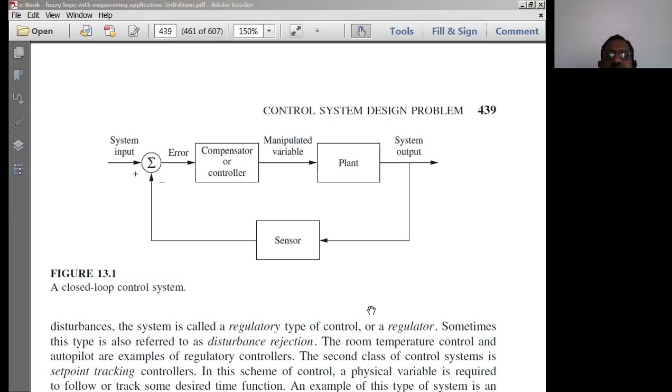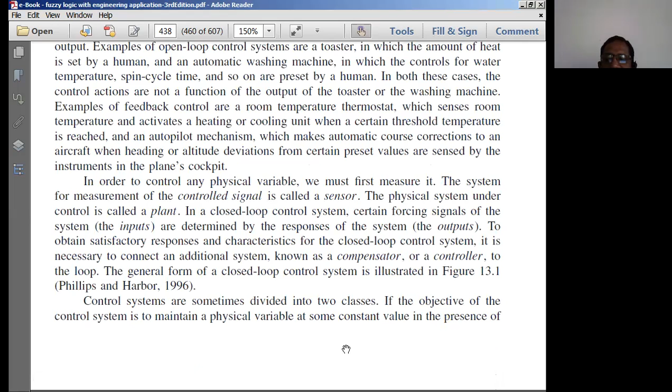So what is the objective of going for a regulatory control system? If the objective of the control system is to maintain a physical variable at some constant value in the presence of disturbances, irrespective of external disturbances, then the system is simply called a regulatory type of control system, or can be called a regulator.

So we thought of a negative feedback amplifier. What is the purpose of a negative feedback amplifier? The purpose is to stabilize the output response of the amplifier. If you think only of stability as the matter of concern for the output of an amplifier, in that sense, in the sense of achieving stability of the amplifier, we can call that control system a regulatory type of control system, where stability is the focus.

It has to be stable, right? So it has to be stable in terms of the frequency response. We expect the frequency response to be stable, to be flat. That means, irrespective of the changes in the parameters of the amplifier, we want the output response in terms of bandwidth and frequency response to be stable for us. So in that sense, the amplifier's closed loop control system is simply a regulatory type of control system.

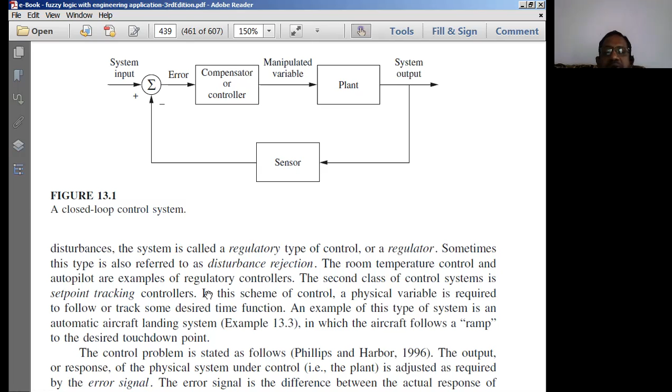So it is normally based on set point tracking controllers, and one is the regulatory type of controller. We can mix up these two applications, autopilot and automatic aircraft landing system, to get advanced aircraft control systems.

But here we are dealing with only examples. So two types of control systems in general we have in fuzzy logic applications: one is the regulatory type of control system, the other is called set point tracking control system.

In this scheme of control, the physical variable is required to follow or track some desired time function, and accordingly the plant output is going to behave. Imagine the plant is an aircraft, and the application here is an automatic aircraft landing system.

So the aircraft has to land automatically. The decision of landing or not to land is based on the tracking mechanism, tracking some desired time function. Based on the results obtained from tracking this desired time function, the pilot is going to make a decision whether to land or not.

So the pilot is more or less going to depend on the electronic system. This electronic system makes a decision based on external variables, or the external atmosphere. Based on the atmosphere prevailing outside, the pilot decides whether to take a landing or not, based on the parameters received.

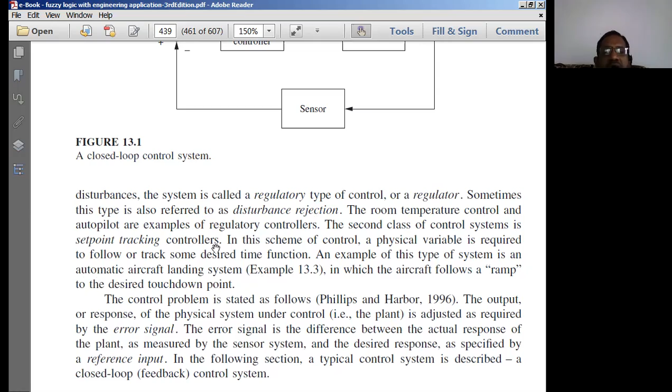Now let us look into a control system design problem normally preferred for fuzzy logic control systems.

The general problem of feedback control system design is defined as obtaining a generally nonlinear vector valued function h.

The input you apply to the plant is very important. For example, think of an aircraft landing system: the input you apply to the aircraft is very important. Based on the input applied, the decision will be taken, meaning the response is considered based on the type of input applied. So what are the important parameters for this control system in general? The input to the plant in terms of a generalized block diagram.

In the generalized block diagram, the plant can be treated as an aeroplane. Before the signal is given to the aeroplane, you normally have a fuzzy controller system, which gives various inputs to the plant, and this plant produces some output. This output is fed back by a sensor to the input of the controller. The input to the controller normally has two inputs: the reference input, called the external applied input, and a feedback signal, which produces an error signal.

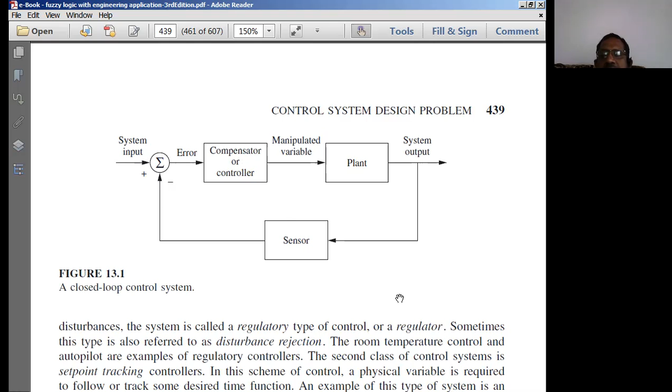So now we normally write a mathematical model of the control system. The general problem of feedback control system design is defined as obtaining a generally nonlinear vector valued function—because this function h represents the response of the fuzzy controller.

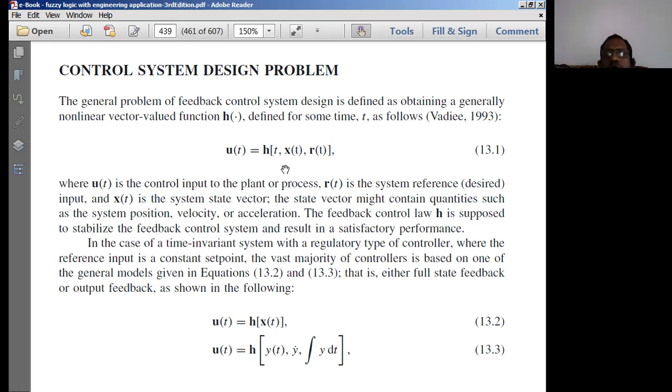The output of this fuzzy controller is always going to be nonlinear in nature, not linear, because it's based on various parameters. Time is always changing, and based on this, these other parameters also change, giving a nonlinear response. So the function implemented by a fuzzy controller is always going to be a nonlinear vector valued function—it is not linear.

So we have a nonlinear vector valued function h of dot, where u of t, as I mentioned, is the control input given to the plant or process—in our case, an aeroplane. And r of t is the reference input, the desired external input applied to the entire control system.

And x of t is the system state variable, known as the error signal for us. The system state variable might contain quantities such as system position, velocity, and acceleration—so the error function depends on many parameters.

Next is the feedback control law. This function h normally supports the feedback control law, which is supposed to stabilize the feedback control system and result in satisfactory performance.

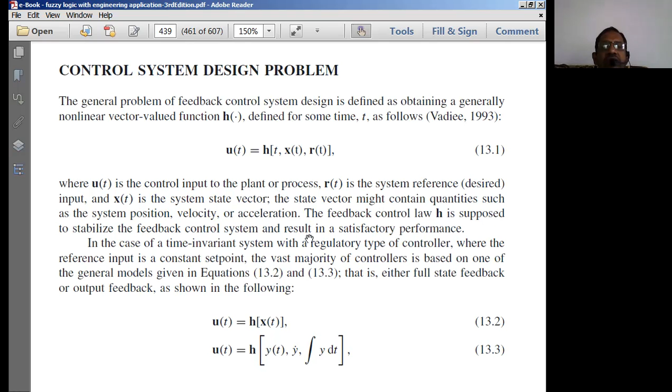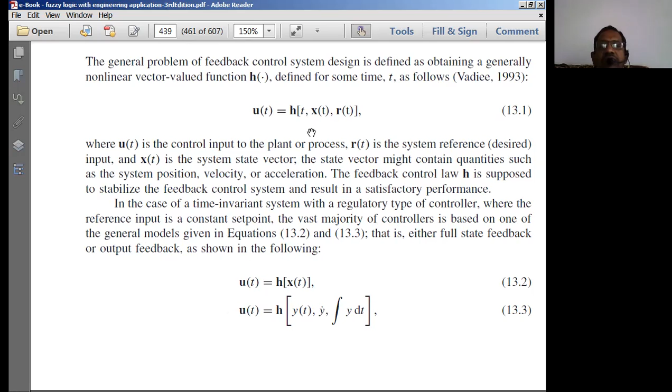So that means the output should be a satisfactory performance output signal. In case of a time invariant system with a regulatory type of control, the time invariant system is going to be the most basic system. So we consider the most basic system with a regulatory type of controller where the reference input is a constant set point, and the vast majority of controllers is based on one of the general models given in these two equations.

Which is either full state feedback or output feedback systems. That means the feedback is going to be based on the state of the system. Now the generalized equation we can write as u of t is equal to h of x of t. That means the h function is going to be called a function which has been implemented by the controller, so that it can be given as an input to the plant or an aircraft. So u of t becomes equal to h of x of t.

That means this h function is going to take the error function as the input. Then u of t I can write as a function of simply y of t, or derivative of the y function, or integral of the y function. What is y of t? Y of t is the response of the plant, and this function h is normally going to get implemented. This y of t definitely depends on x of t in turn.

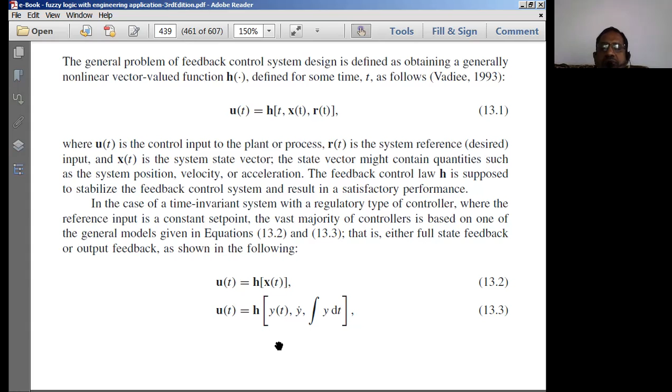So this y of t is processed in such a manner that based on the conditions, y of t can be applied directly, or the derivative of the output response can be applied, or the integral of the output response is normally applied and used in the controller function in order to get the output of the controller, which is given as input to the plant. So this is the basic thing we're going to have on the response side, where y of t is the system output response or response function.

So let us start with a simple condition here. In case of simple single input, single output systems, what is the simplest system we'll be having? Single input, single output is the simplest system in the world. For example, a transistor amplifier. In the case of transistor amplifier, we have dealt with a single input, single output condition, so it's going to be a simple single input, single output system. The simple amplifier, a negative feedback amplifier we discussed in the AEC subject, simply comes under the single input, single output system, and it is going to be a regulator type of controller.

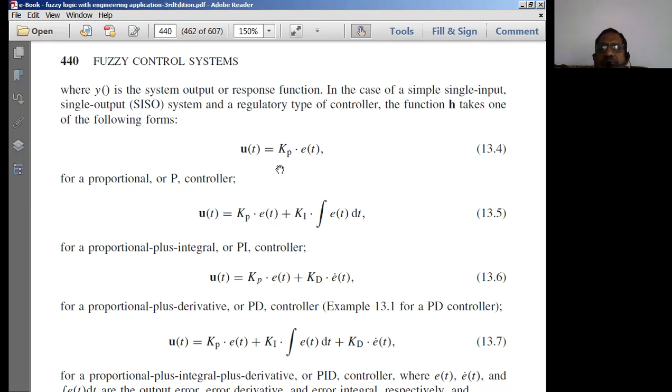So for such particular functions, a generalized function we can write. How do we write that? The function h takes one of the following forms, where u of t is proportional to e of t. Obviously the input we apply to the plant is purely dependent on the error function. So when you equate it, u of t becomes equal to kp into e of t, where kp is the proportionality constant, which depends on the type of controller we normally use, or system constants. Like this, we can apply it to various types of controllers. If the function u of t derived is proportional to the P controller or process controller, then we can have one more parameter applied here, which is an integral function.

So in general, the function is going to be of two types. From the knowledge of pulse and digital circuits, we have a function representation. A function is going to be a combination of what?

The particular integral solution is simply going to be a two-function representation: one is known as the transient response, and the other is the stable response. This transient response is normally represented by a particular integral, and this is represented using constant values.

This is the system response we already dealt with in pulse and digital circuits. For a particular process controller, we normally represent the entire system in terms of the stable signal, the stable response, and the transient response.

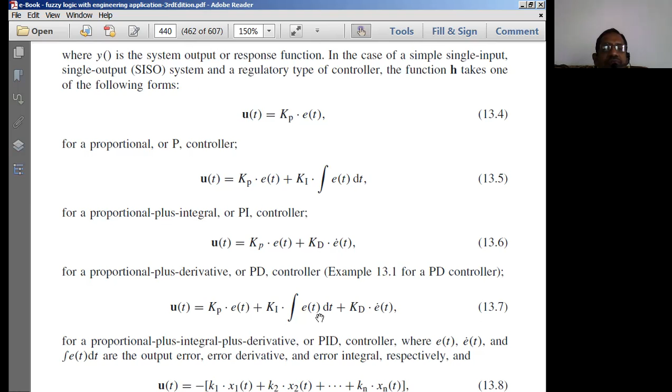So transient response we can take as simply the integral function, and proportional plus integral function we can have a differentiation function. This is the integral constant, this is the differentiation constant, so we can write it as e dot t, a single differential component.

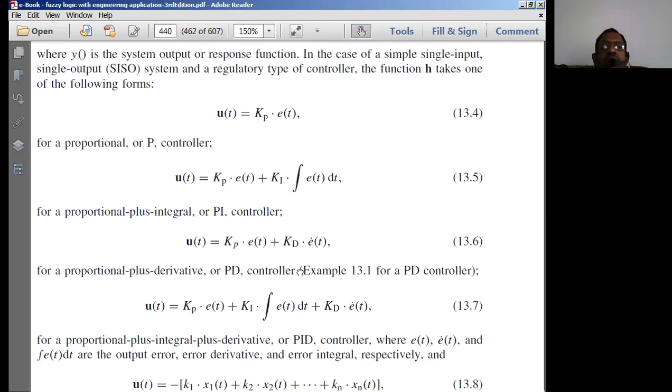When you combine all these things, the system response we get will be the combination of integration and differentiation, and all this part is simply the transient response, while this is the steady state response. When you combine these two, we represent the input applied to the actual system. That means it is a generalized representation of a system considering feedback control systems, and we apply such a response to the fuzzy logic control system as well. That is why we are discussing all these things.

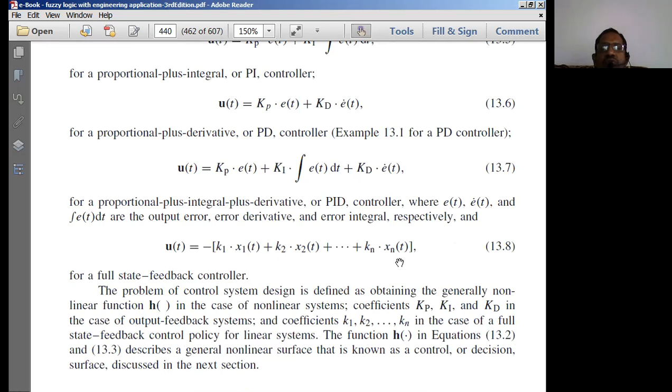Now the overall output of the controller, we can write as equal to U of t, which is nothing but the plant input, can be written as equal to k1 into x1 of t, k2 into x2 of t, so on up to kn into xn of t for a full state feedback controller system.

We can write it like this with various parameters, where the problem of control system design is defined as obtaining the generally non-linear function. This h of t is normally producing a non-linear function in case of non-linear systems. The coefficients kp, ki, and kd are used in case of output feedback systems, and coefficients such as k1, k2, k3 are used in case of a full state feedback control system for linear systems.

So like this, we can represent the various outputs in terms of the coefficients of the non-linear and linear systems. This is the simple representation for linear coefficients, and this is the representation for non-linear coefficients of the control system.

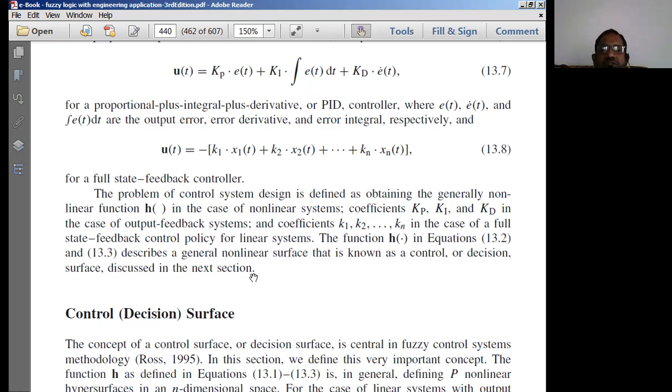Let us try to go into the example of a fuzzy logic control system. Before the example, we discussed the fuzzy logic in the previous session, where we covered the most important blocks in the fuzzy logic control system. The fuzzification process is an important task, and the defuzzification process is also an important task. So these two are the important tasks for us to really understand.

So for fuzzification, what is so much important for us? It is the knowledge base which is so much important for us. After that, inference is also important for us. We discussed four inference methods in our syllabus, and we will be using any one of those four inference methods in order to get

the fuzzified values or pure solutions to the fuzzy sets based on the rule base. As we discussed, we covered intuition, ranking, order ranking, and neural network principles as inference methods. One of the methods is the rule base, so based on rule base, we normally have the inference method, and accordingly we get the response of the fuzzy system.

And after we get this response in terms of fuzzy logic, this is applied for the defuzzification process, so that a plant can really understand the fuzzified result of the system. That's how we normally apply fuzzy logic to the closed loop control systems.

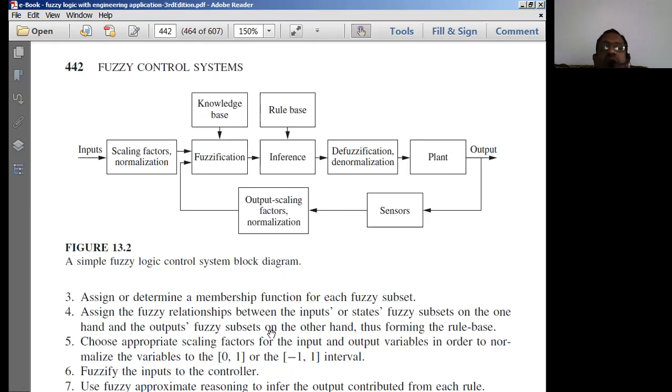So this is the process which we are going to do in the case of fuzzy logic control systems. Now what we can think of is, I'll try to go with an example of a fuzzy control system.

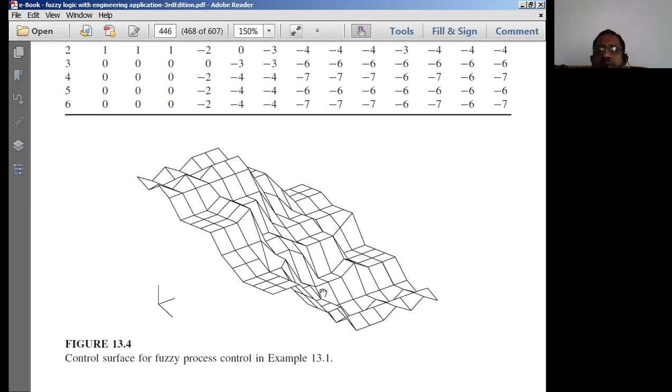In this example, I want to go with the first example given in the textbook, and the textbook is going to be by Timothy J. Ross. The title of this book is Fuzzy Sets and Fuzzy Logic with Engineering Applications, third edition. I'll be sharing this soft copy with you, so from this, you can prepare notes for this particular example.

Now the values I'm going to represent are not so important, but they should be taken into consideration based on the membership function which we normally have or are supposed to get. Based on that membership function, we normally put the values for the aircraft landing control system problem. So let us try to go with the aircraft control system problem now.

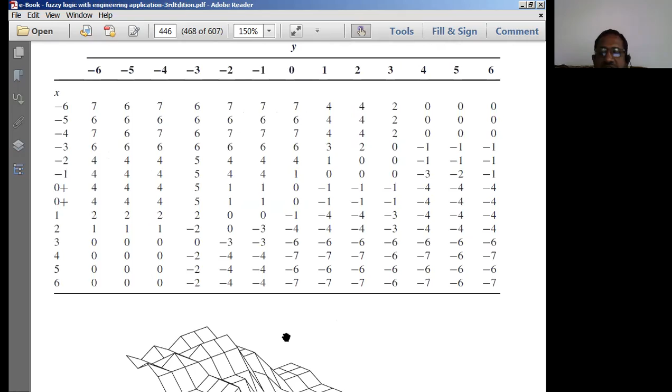In this session, I'll try to go with what the aircraft landing control problem is. Then in the next section, we go in detail with the aircraft landing control system. Now, the following example shows the flexibility and reasonable accuracy of a typical application in the fuzzy control system.

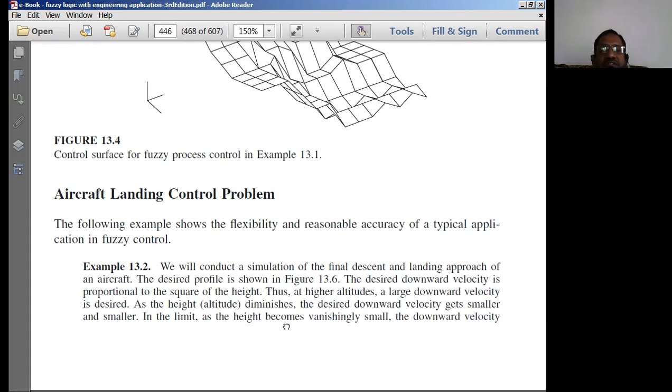What is the application we are going to have? This is an example of conducting a simulation of the final descent and landing approach of an aircraft. That means the aircraft should land. For landing, it has to come down its velocity - that is known as final descent - and landing should take place by the aircraft. In an aircraft system, landing is very crucial. Takeoff is not that crucial, but landing is very much crucial. Therefore, landing is a very important control system, closed loop control system application.

The desired profile is normally - we should have some profile for the landing. That means there should be some predefined function to be followed, predefined value to be taken into consideration. So the desired downward velocity is proportional to the square of the height. This is the condition: the desired downward velocity, when the flight is going to land, the velocity of the flight decreases as it comes closer to the land. That means as the height of the aircraft decreases, the velocity also should decrease. That is called the desired downward velocity - downward meaning decreasing velocity is proportional to the square of the height.

This is the condition on which we normally figure out, design, or simulate a control system based on fuzzy logic. Thus, at higher altitudes, a large downward velocity is desired. That means as the altitude of the flight is high, a large downward velocity is desired - velocity is low when close to land, and high when at a greater distance from the land. So as the height diminishes, that is, altitude of the plane diminishes, the downward velocity also gets smaller and smaller. In the limit, as the height becomes vanishingly small, the downward velocity should become almost zero.

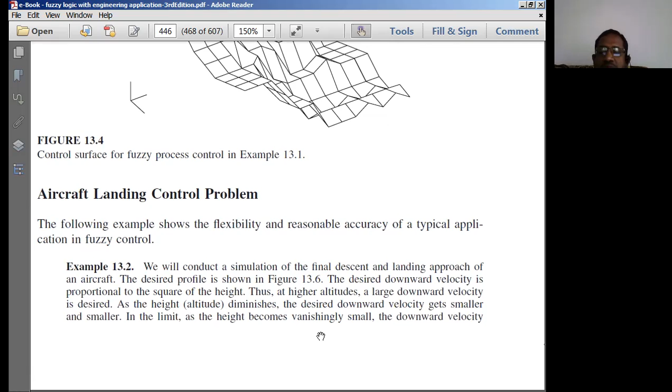This should also go to zero. So this is the design criteria or design condition for the aircraft control system. In this way, the aircraft will descend from altitude promptly, but will touch down very gently to avoid damage. While touching the ground, the aircraft should touch very gently, not just bombard onto the Earth's surface. This is how we manage the closed loop control system designed using fuzzy logic.

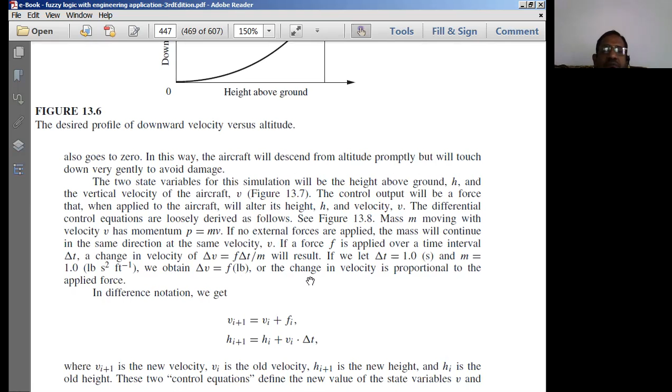Now, what is the profile of the aircraft landing system?

The desired profile of downward velocity versus altitude is normally like this. The flight is coming, flying at this height. Now the flight wants to land. Let us suppose the flight has started its landing from this point above the atmosphere surface. The flight is normally going to land here in a non-linear fashion. It's normally not going to follow a vertical path, it's going to follow a parabolic path.

That means the curve should decrease exponentially. As the flight is going to land, it won't land vertically downwards, it lands in a systematic, non-linear manner. If you observe carefully, this is downward velocity. Vertically is the velocity, horizontally is the height. This is zero height, this is maximum height. Towards this side is maximum height, towards the right the arrow shows height increasing, towards zero height is decreasing.

So the velocity, if you see carefully, vertical is the velocity line. As the flight is coming closer to the ground, the velocity is also decreasing. Once it touches the ground, the downward velocity should almost become zero. That means the flight should compulsorily change its mode of operation once it touches the land. The mode of the flight is always going to be based on the flight touching the land surface.

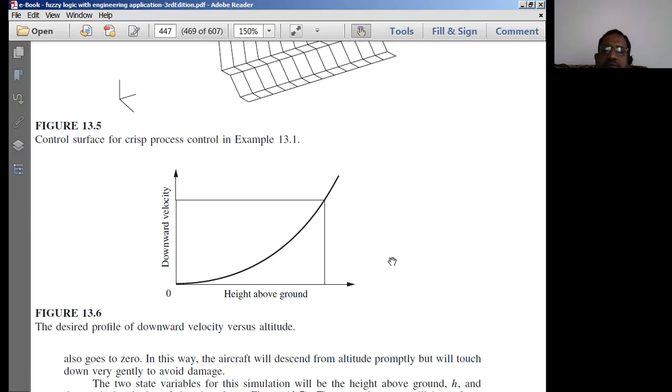So this is the basic profile of the aircraft landing. Based on this profile only, we are going to discuss the closed loop control system.

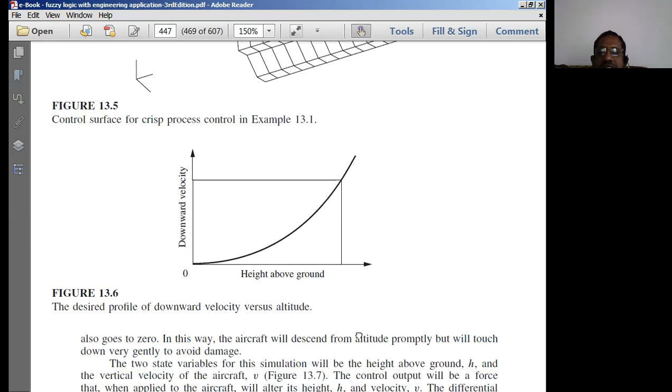Now for this closed loop control system, what are the parameters involved? Velocity v and height h - these two are the parameters involved in this particular process. We consider these two variables as the state variables for this simulation: height above the ground h, and the vertical velocity of the aircraft, called small v.

The control output will be a force, that when applied to the aircraft will alter its height h and velocity v. The output of the aircraft is taken as the control output, which is a force applied to the aircraft. When applied, it controls and alters its height and velocity. That means the decision of whether to land or not is taken based on this force parameter. Let us have an example now.

A mass m moving with velocity v has a momentum P equal to m into v, from general physics. If no external forces are applied, the mass will continue in the same direction at the same velocity. If the mass is constant and no external forces are applied, the mass simply continues in the same direction at the same velocity. If force F is applied over the time interval delta t, then there will be a change in the velocity.

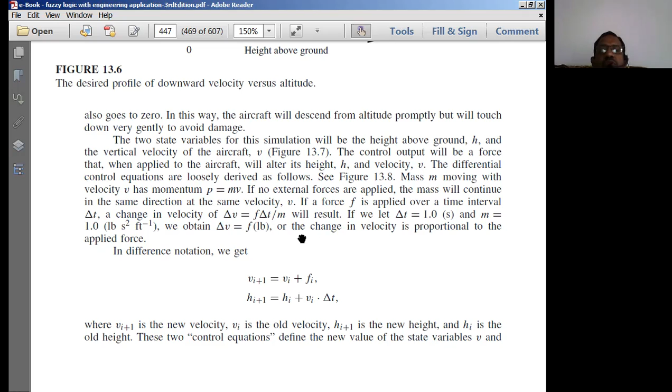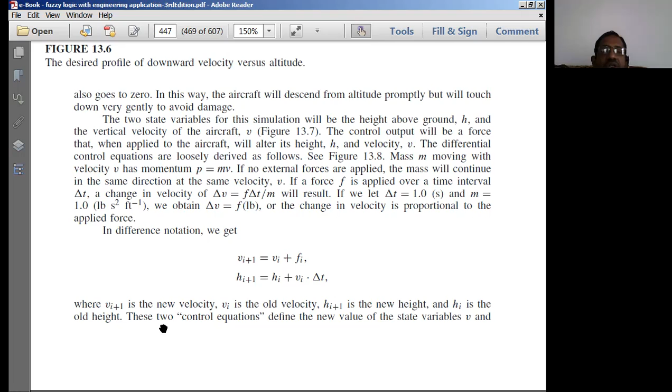If we write the mathematical representation in difference notation, we can write v of i plus 1 is equal to v of i plus fi, and the height h of i plus 1 is equal to h of i plus vi delta t. Height is equal to velocity into time period, which we already know. So based on this simple principle, we have written this basic equation where vi plus 1 is the new velocity, vi is the old velocity. Similarly, hi plus 1 is the new height, hi is the old height.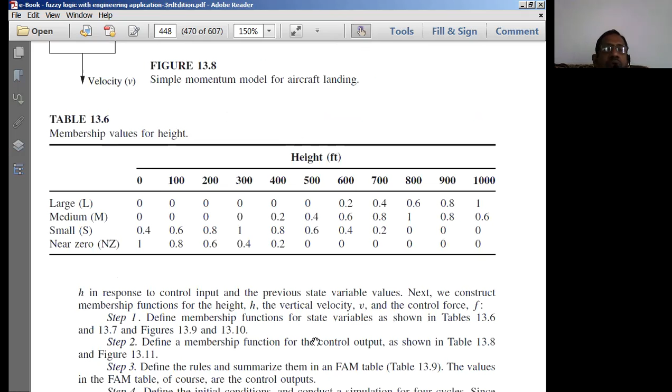So these two control equations define the new value of the state variables in fuzzy logic. These are the various parameters that we normally consider in this process. Now what is the story here? What is the moral, what are the parameters we have to consider?

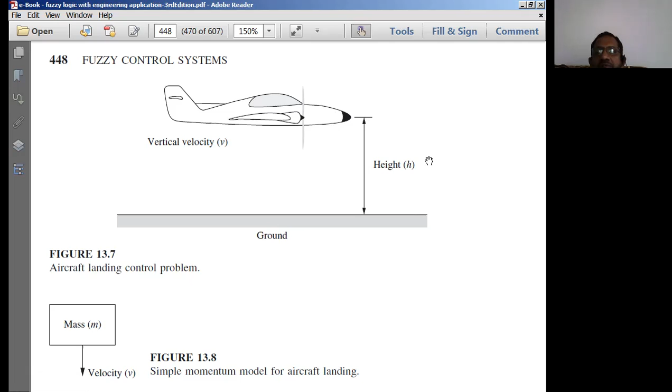Most importantly, this is the aircraft which has to land now, so it is moving with a velocity v. Presently, above the ground level, it has some height h. It has to land now, and from this it will take a parabolic path, a non-linear curve, following this non-linear curve to land on the Earth's surface.

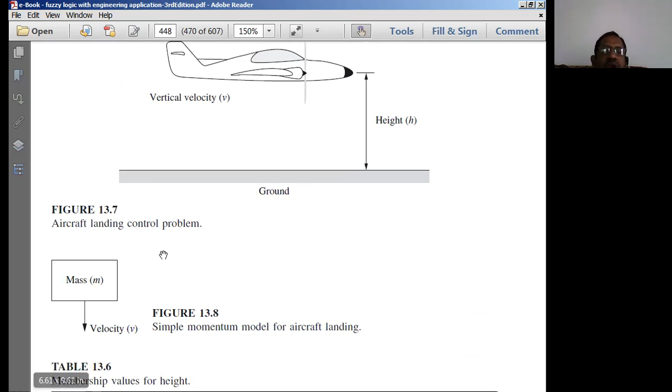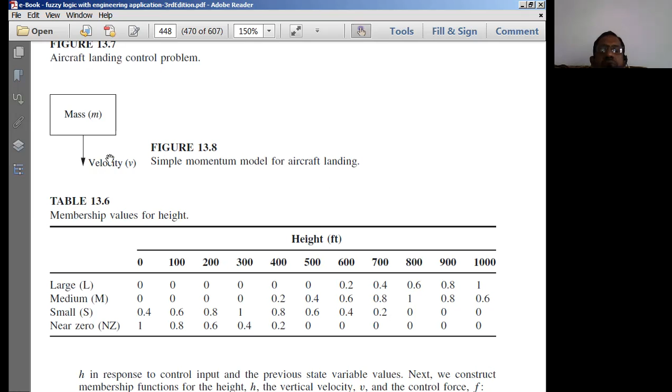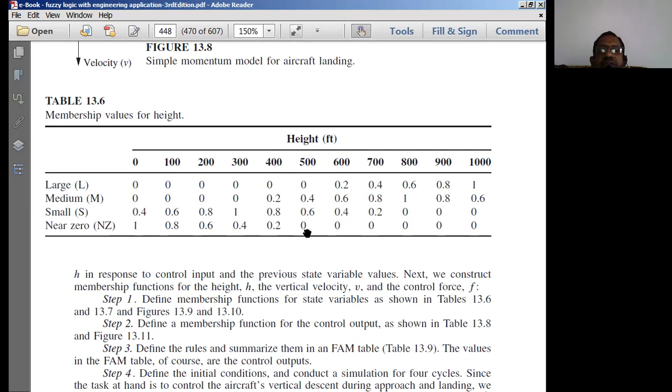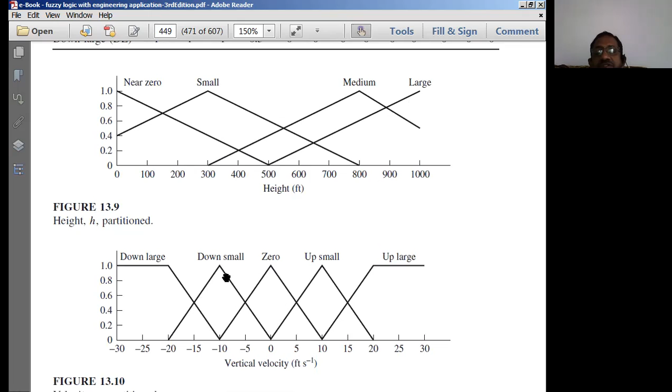Now what is most important is we have to figure out the membership function for the height and the membership function for the velocity. These two membership functions are very important for us to get the fuzzy output. The fuzzy system takes these two as inputs, and based on the belongingness and various constraints applied to these conditions, we get the output from the fuzzy system.

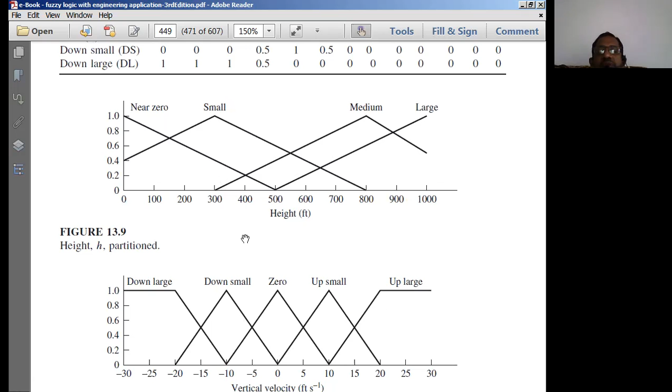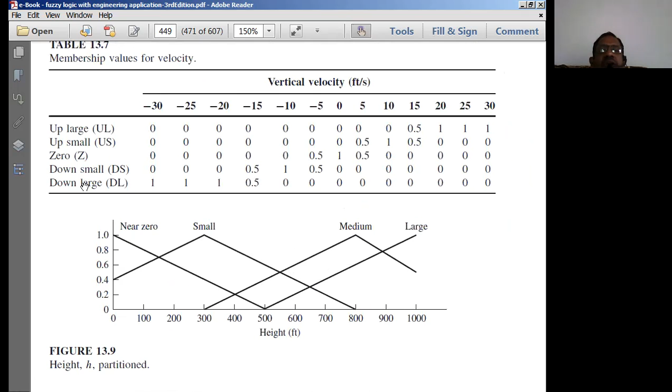So in order to develop a fuzzy system, we have to develop a knowledge base, which gets developed from the membership functions. Here I am taking the membership function as a triangular membership function. In the example of an aircraft landing system, it is going to be a triangular membership function. Now we have to figure out what values we are getting, 0.5, 1, 0 — these are all approximate values, not exact values. Keeping this membership function in view, these values have been put randomly for height as well as for velocity.

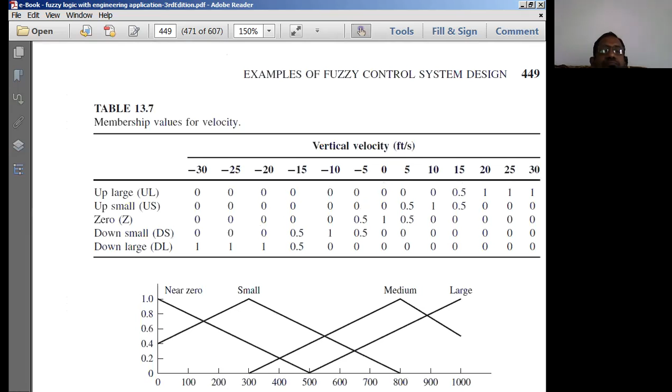Now for height, what are all the various values for height you normally going to have? In probability, you're going to have only two levels, 0 and 1. Whereas in fuzzy logic, you're going to have multiple levels.

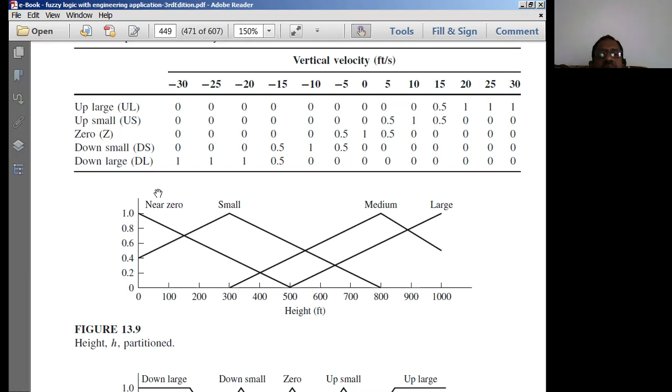So these are all the various heights of the flight above the ground level. The flight normally has different heights with respect to the atmosphere and the ground level. That means we should get various membership functions for various associative values that we normally consider. Keeping all this in view, we have the following.

See here, this is height. Height is 100 meters above the ground, 100 feet. It has been taken in terms of feet. It is at 100 feet. What is that considered as? It is considered a small height.

Up to 300 feet is considered a small height, up to 400, up to 500. So from 300 to 800 is going towards medium, meaning medium is considered from 300 to 800.

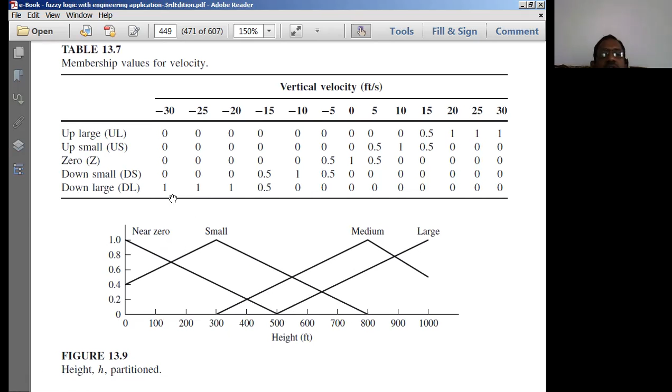Similarly, what does small mean? It is considered from 0 to 800 as small, and from 300 to 800 is considered medium according to this particular graph. So therefore, we have various heights called near-zero height, small height, medium height, and large height.

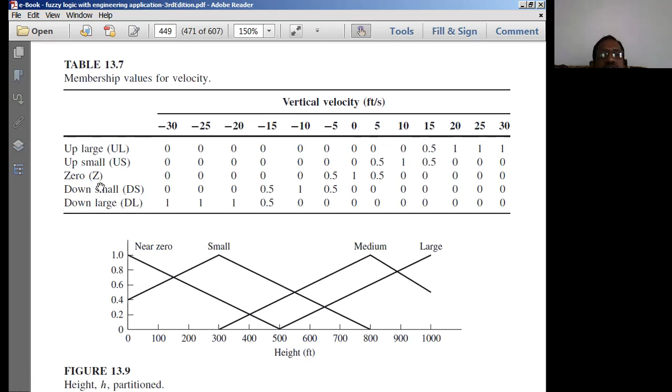Similarly, we have vertical velocities: up large, up small, zero velocity, down small, down large. These are the velocities we can consider. When velocity is coming downwards, it is minus; when going upwards, it is plus. This is with respect to the velocity relative to the earth's surface.

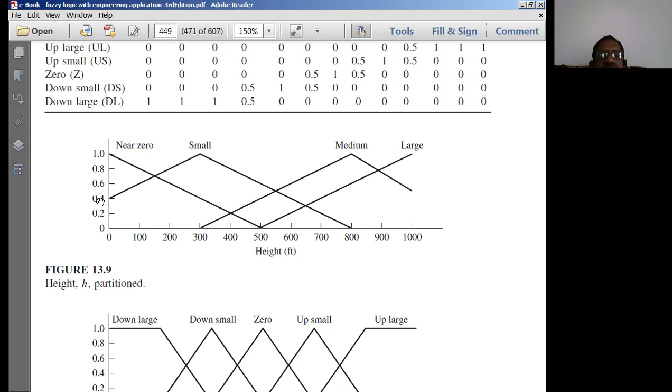On the x-axis we have vertical velocity, and on the y-axis we have the membership function mu. That's why we get the maximum value as 1. These values vary between 0 and 1 because they are membership values.

Now, how do we form this function? If the velocity is going to be 0, that means the reference is 0, and the velocity value is going to be 1.0. If it is decreasing, the curve goes to down large. It is increasing at another point of discussion.

So down small, down large, and 0 — this is minus 30. Minus 30 means the aircraft is at a much larger height above the ground level. Now what should be the velocity? Down large means the velocity should be very high because the height is very high, so value 1. As it comes closer to the ground surface, the velocity decreases.

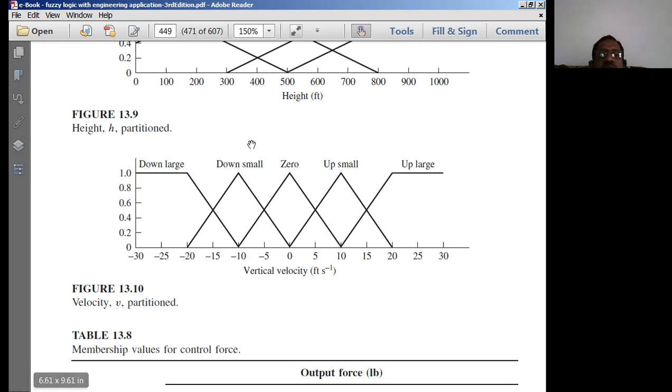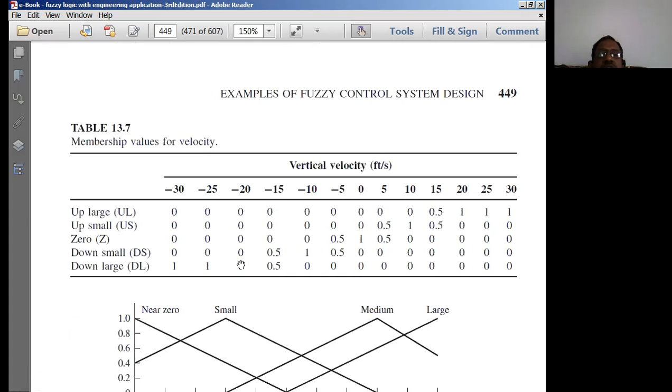Like this, we draw the various membership functions, and based on these we can figure out these values. That is why in the exam, you should first draw these membership functions, then based on these limitations approximately figure out the membership values for velocity and height. This is how we form this particular table called membership values for velocity, assigning values of membership functions.

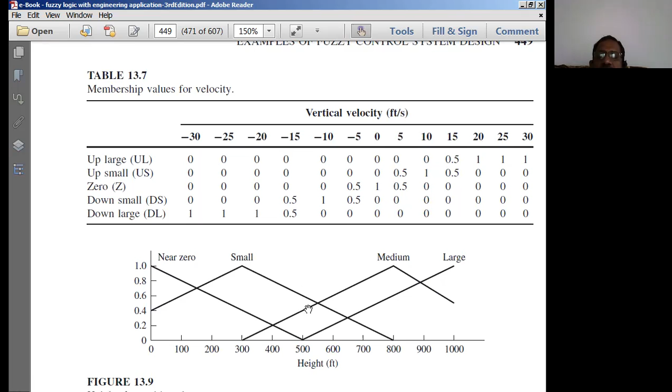So this is forming the knowledge base for the fuzzy control system. In the next section, we will proceed further with the aircraft landing system and complete the aircraft control system. Thank you very much for today's session.